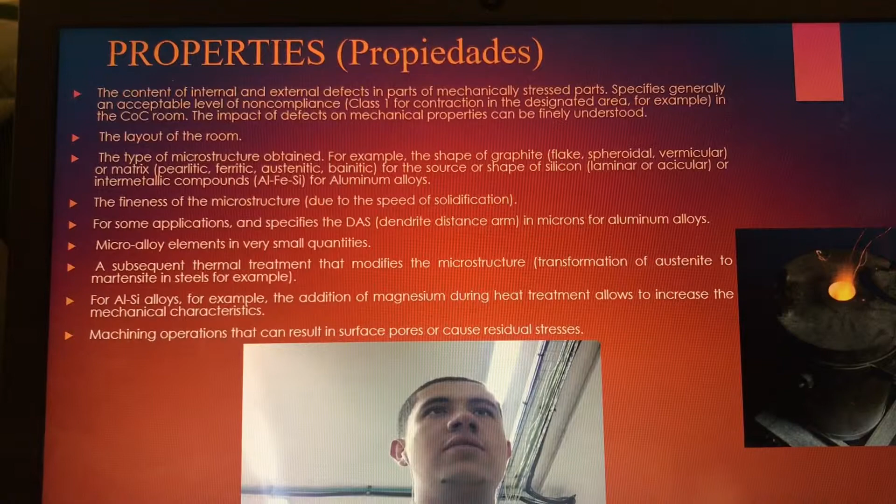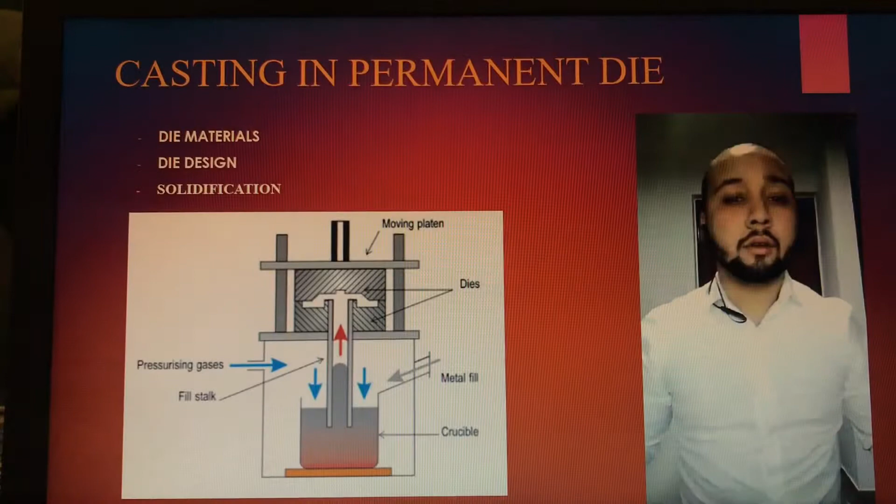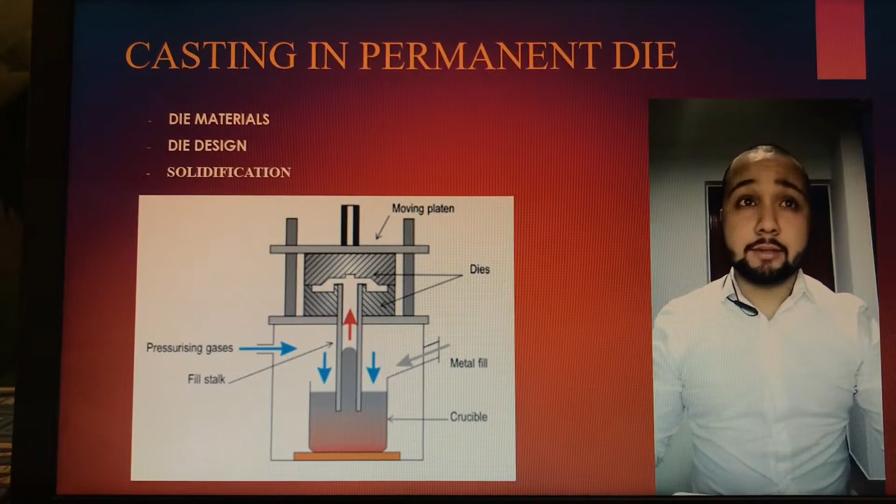Casting in a permanent matrix is different from other casting processes because the matrix can be used more than once. Matrix materials must have a high melting point to withstand erosion by the liquid metal at pouring temperatures, and must provide the necessary strength so the matrix doesn't deform. It must also have high thermal fatigue resistance to prevent premature cracking, which can leave marks that ruin the final cast. The matrix material can be cast iron, though steel alloys are most commonly used.

For casting high melting alloys such as brass or ferro materials, the matrix steel must have a considerable proportion of stable carbides so that resistance to high temperatures can be retained. Graphite matrices are generally used for steel, though they can only be used in simple ways. Coatings can be chosen according to the cast temperature.

Matrix design: all permanent matrices have common features. First, it's really important that the solidified cast can be removed easily from the matrix cavity. In this way, the shapes that can be produced are more limited than in a disposable matrix casting.

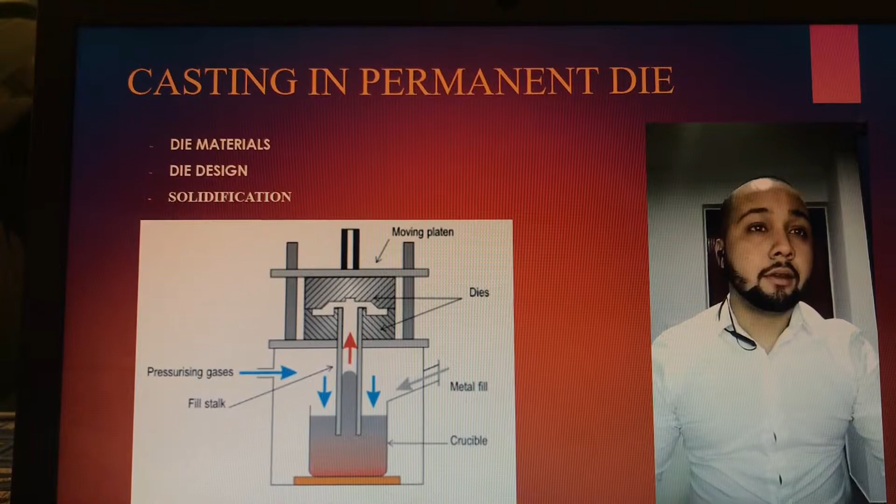Second, internal cavities are formed with the help of fixed or mobile metal cores. Skewed shapes require the cores to be made in several interlaced parts, which are removed in a fixed sequence. Third, niches in the matrix allow exact location of inserts such as threaded inserts, heating elements, etc.

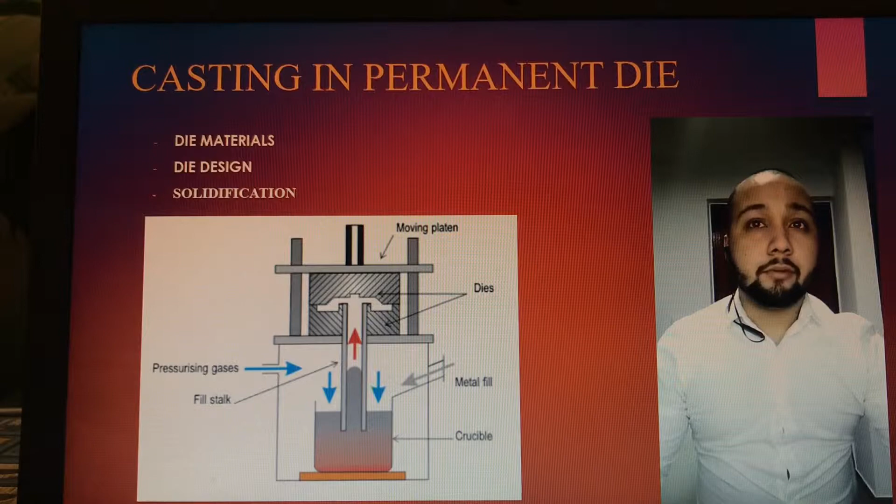Fifth, matrix material is not permeable. Therefore, vents must be provided to avoid trapping gases. The clearance along the separation planes and around the ejection bolt can also serve as vents.

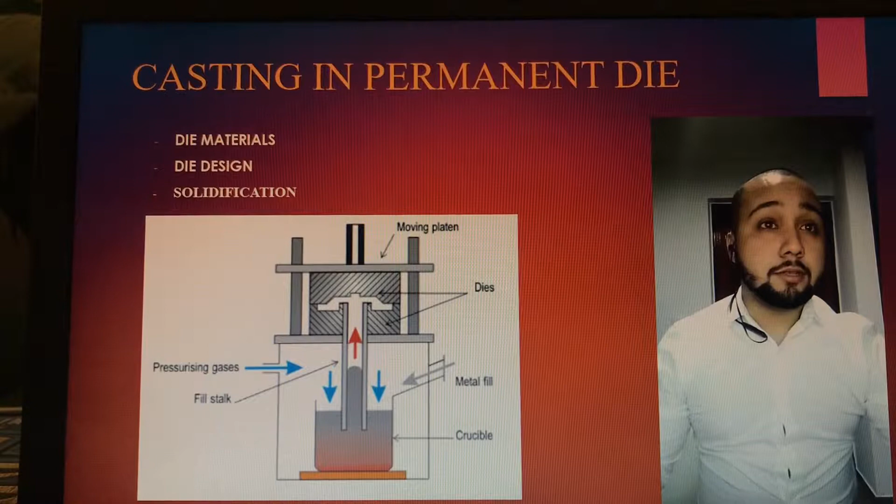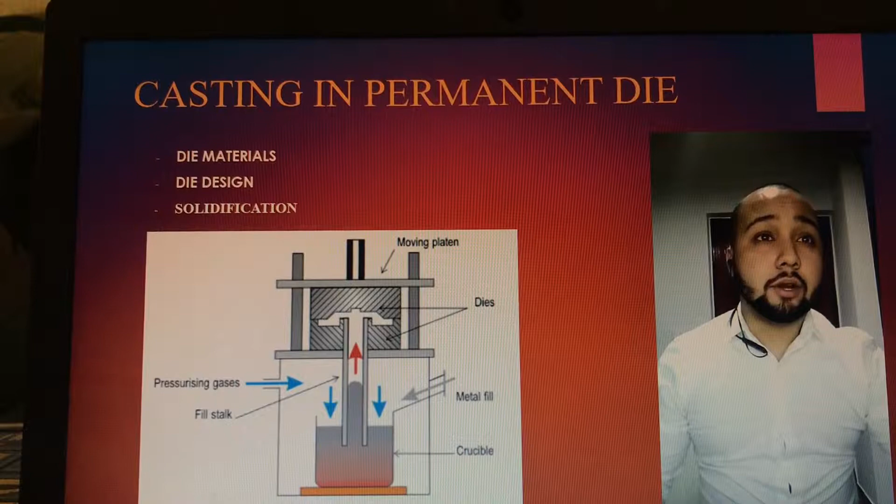Solidification: the permanent mold works like a heat exchanger. At the start of production, the mold must be preheated to the desired temperature, generally between 150 and 200 Celsius degrees for zinc, 250 to 275 Celsius degrees for magnesium, between 225 and 300 Celsius degrees for aluminum, and 300 to 700 Celsius degrees for copper alloys. The heat released by solidification is removed through radiation, fins, or bolts.

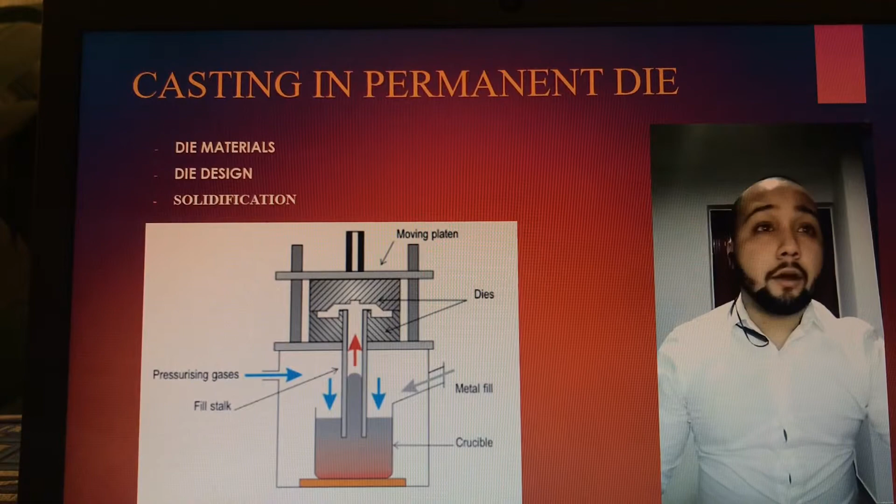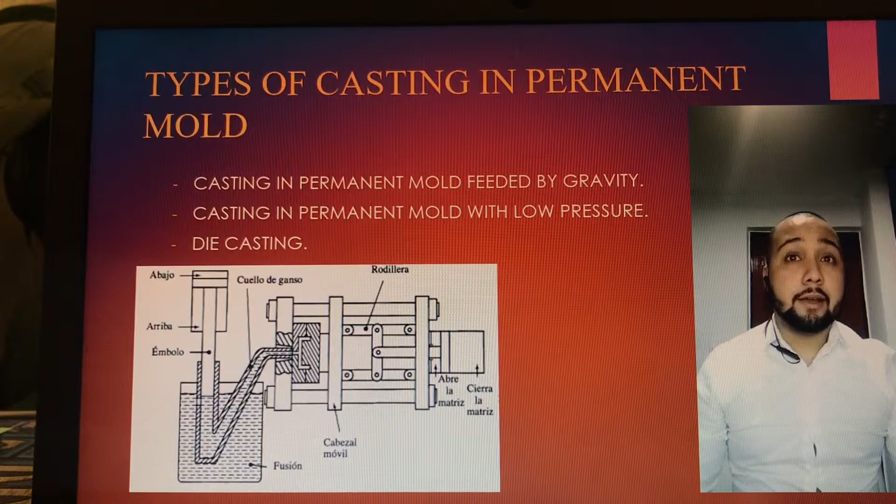Second, casting in a permanent matrix with low pressure. The mold is placed above the melting furnace, and the metal is fed by air under pressure through the lower discharge hatch into the mold cavity, ensuring a smooth filling.

The solidification is directed from the top down, and the air pressure is released as soon as the cavity is filled with liquid metal. In this way, material losses are minimized. The thin coating ensures an acceptable surface quality.

Die casting. These casting processes consist of filling the matrix cavity with high pressure, making the cast metal fill completely all the cavity details, something that couldn't be done with lower pressures. Both halves keep joined through high force, working like a hydraulic press.

It's very important to apply lubricant to the matrix surface in each process. It could be graphite with an oily base diluted in water. All these processes can be mechanized.

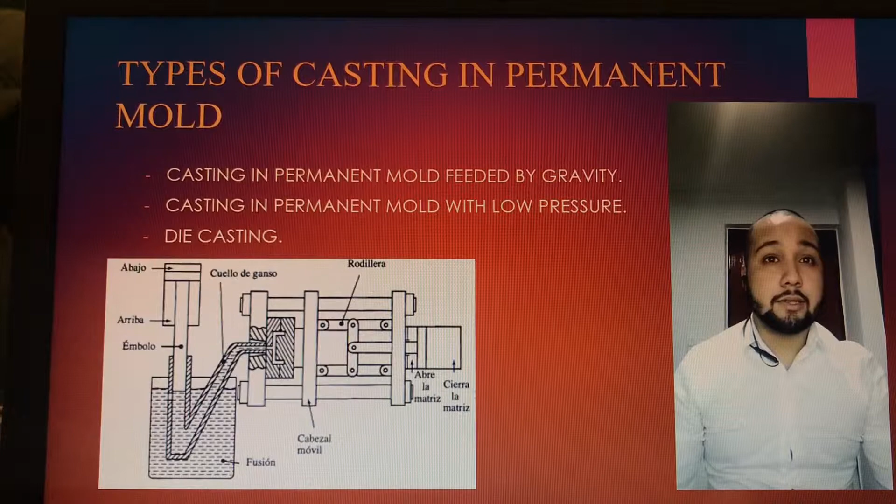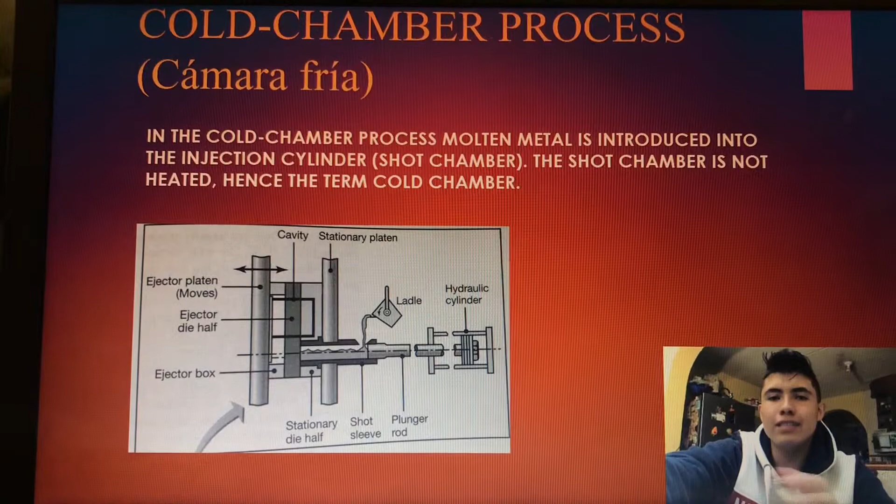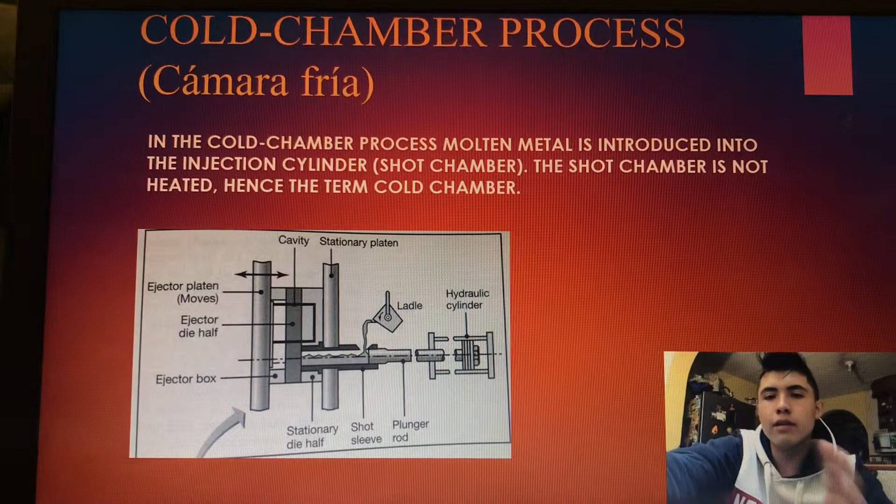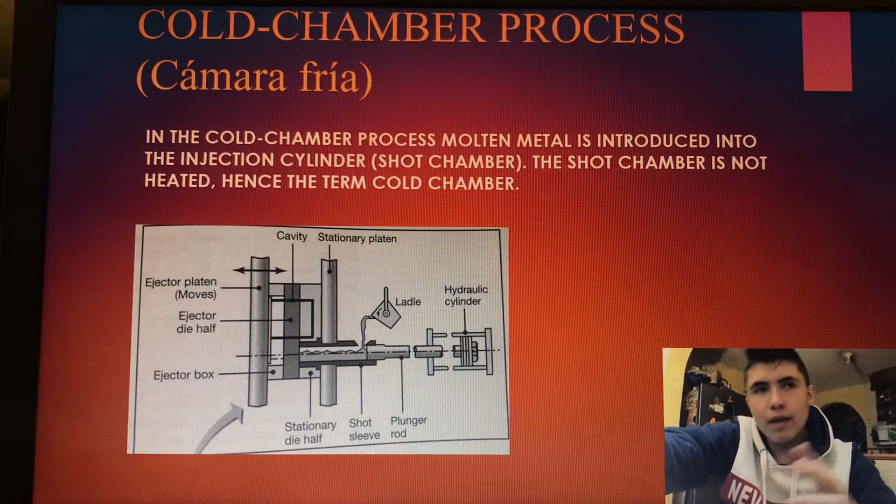In the cold chamber process, molten metal is introduced into the injection cylinder. The shot chamber is not heated, hence the term cold chamber. The metal is forced into the die cavity at pressures typically ranging from 20 to 70 megapascals, although they may be as high as 150 megapascals. The machines may be horizontal or vertical.

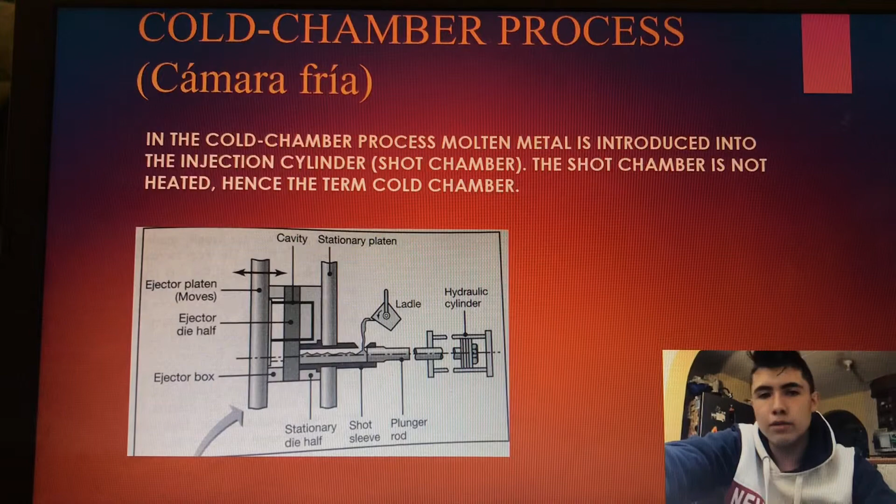Aluminum, magnesium, and copper alloys are often cast by this method, although other metals, including ferrous metals, are also cast. Molten metal temperatures start at about 600 degrees Celsius for aluminum and magnesium alloys and increase considerably for copper-based and iron-based alloys.

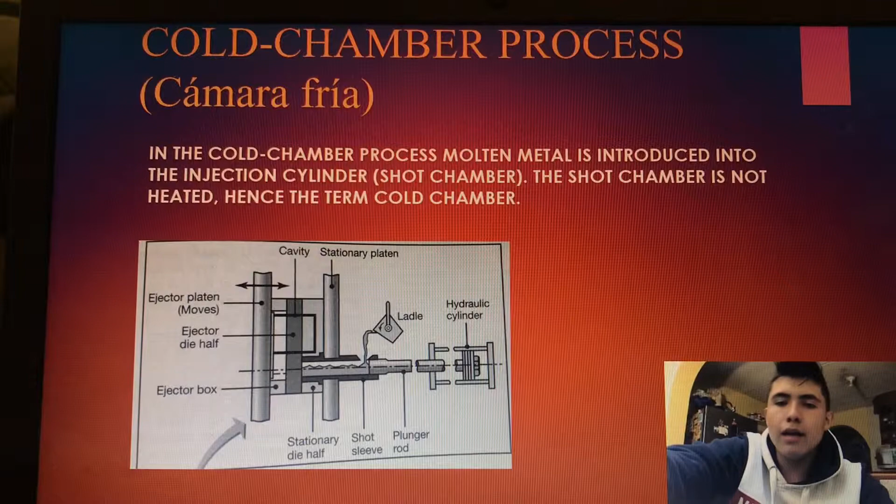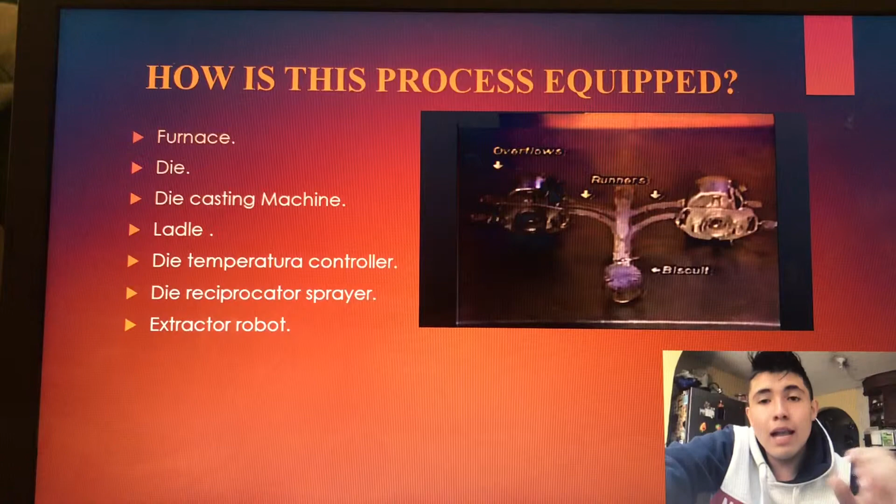How is this process equipped? The principal parts are the furnace, a die, and the die casting machine, with additional equipment including a die temperature controller, a die reciprocator sprayer, and an extractor robot.

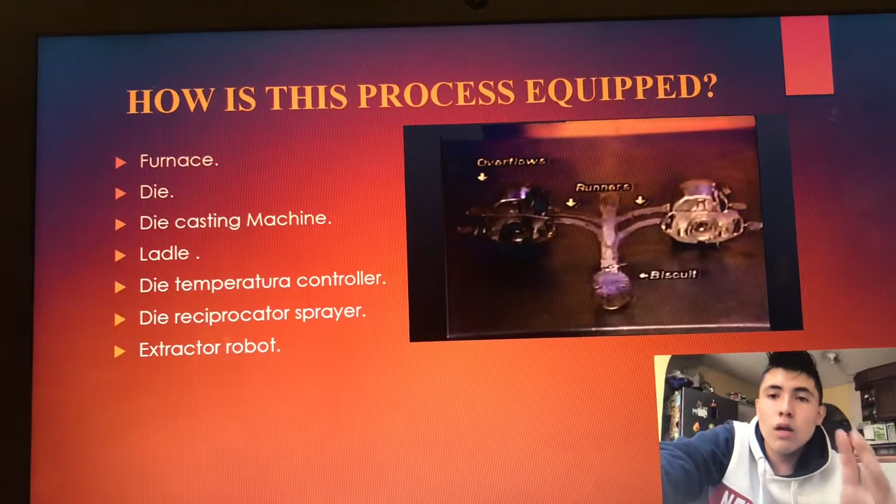At the moment of making the casting process, a piece comes out formed of biscuit, runners, and overflow, as shown in the image.

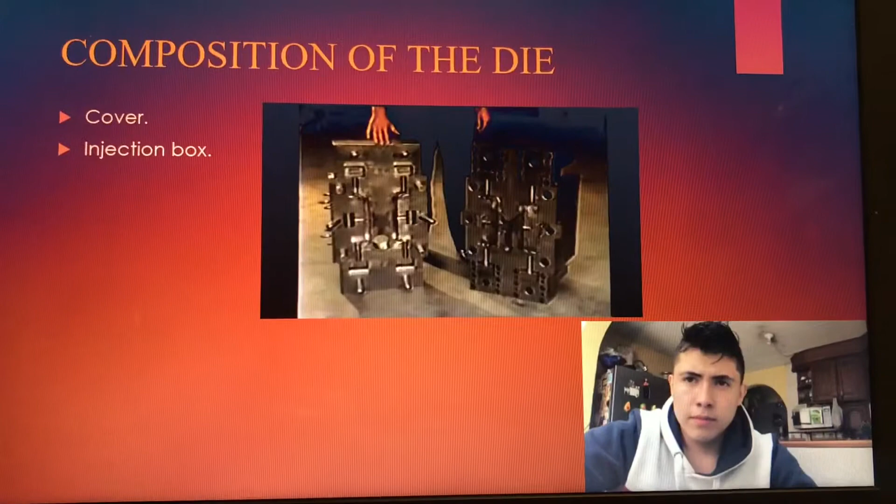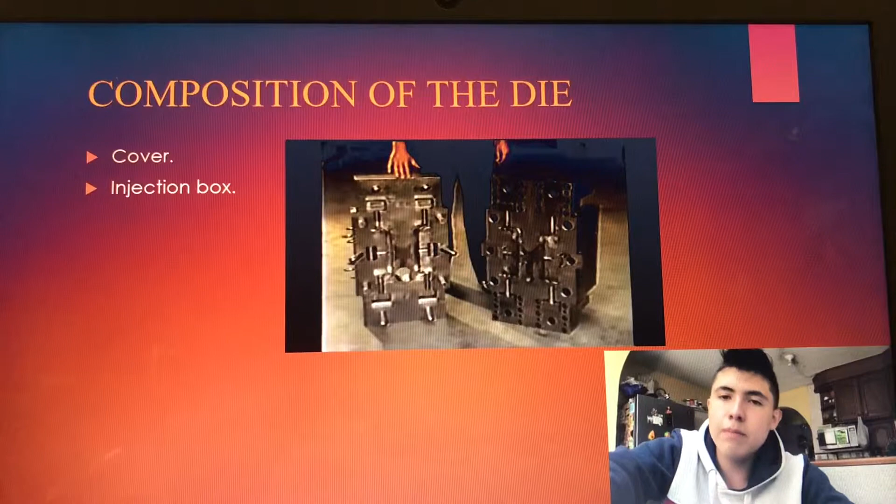The matrix is composed of two parts essentially, which are a cover and an injection box. The main functions of the cold chamber matrix process are to keep the two halves of the matrix firmly together and inject the molten metal at the correct speed and under high pressure into the cavity of the matrix.

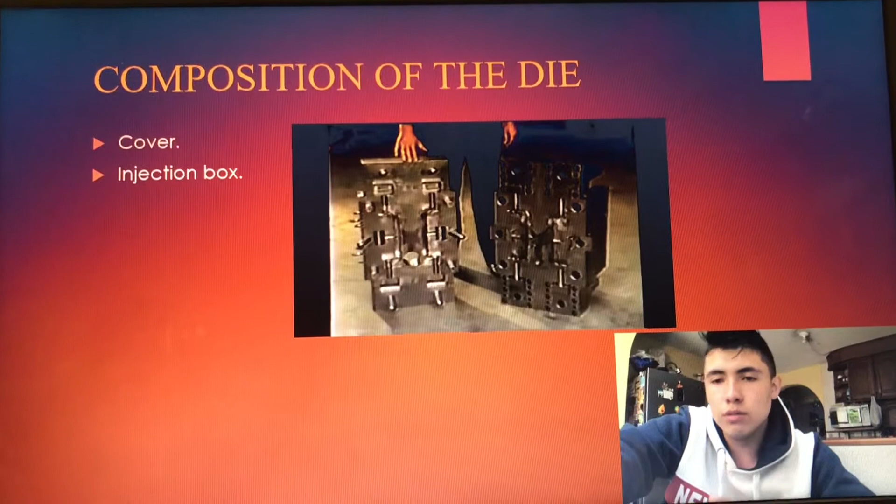The machines are classified by the tons applied to the matrix to keep it closed, ranging from 10 tons to 3,000 tons.

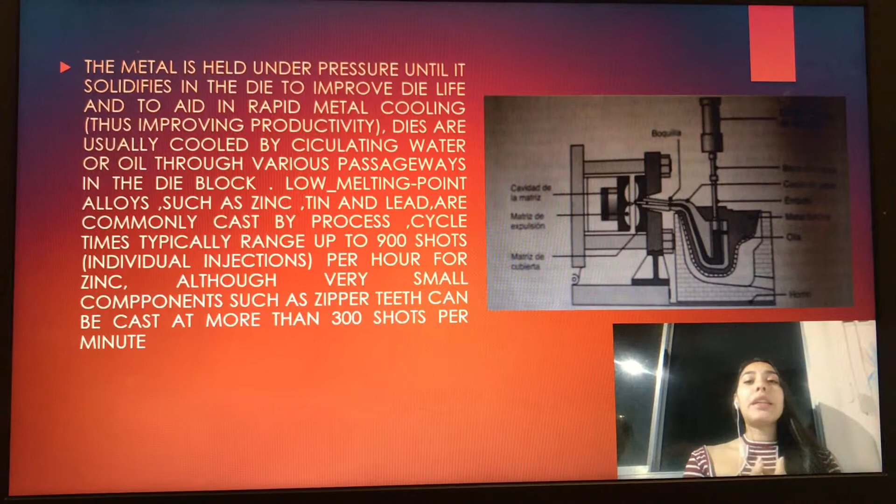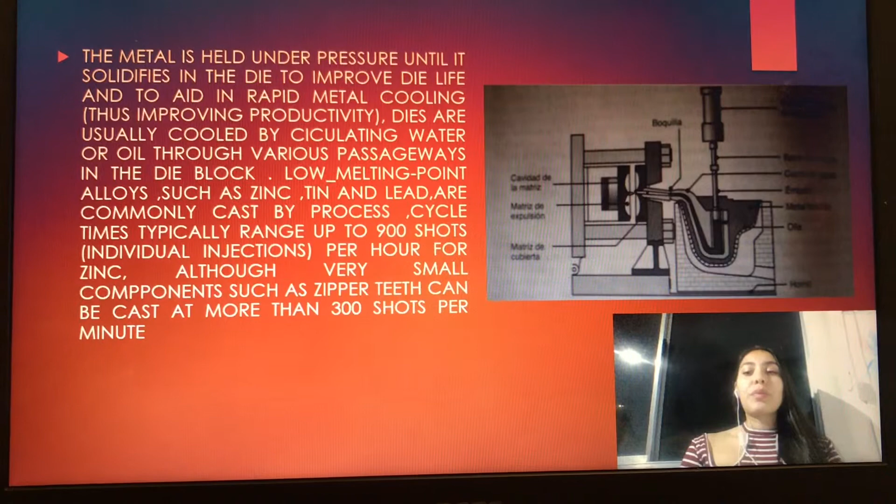What sets the cold chamber process apart from the hot chamber process is the shot end. In the cold chamber process, the injector is outside the vat of molten material, while in the hot chamber process it is inside.

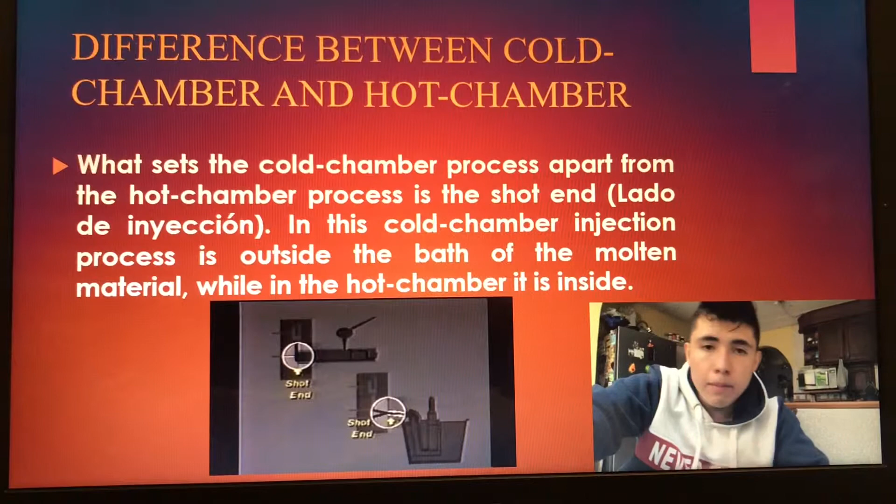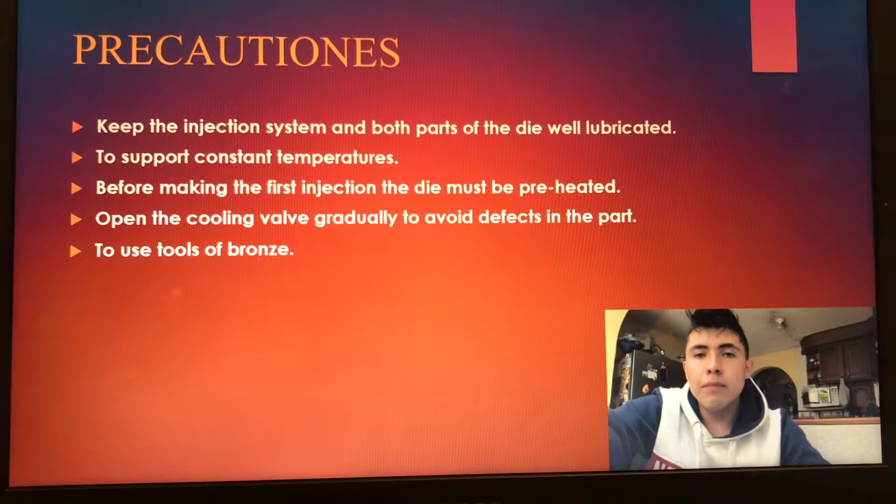To finish, precautions. The first: keep the injection system and both parts of the die lubricated.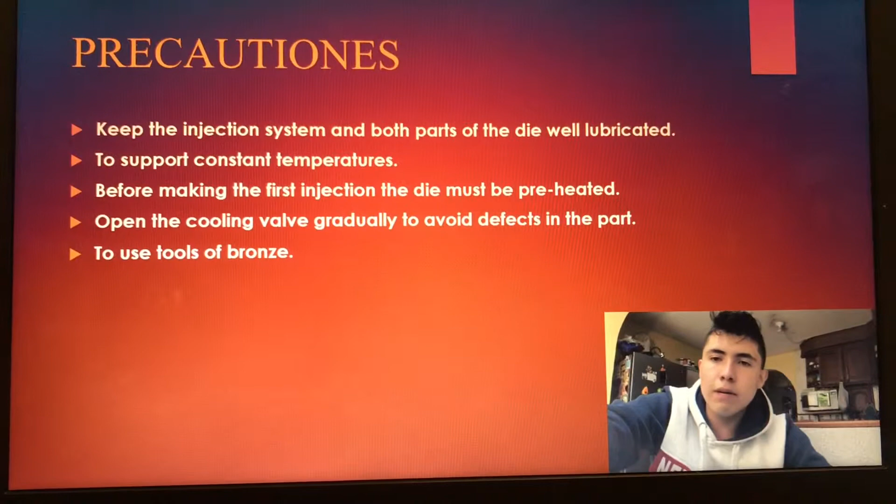To support constant temperatures, before making the first injection, the matrix must be preheated, and the cooling valve must be opened gradually to avoid defects in the piece, and bronze tools should be used.